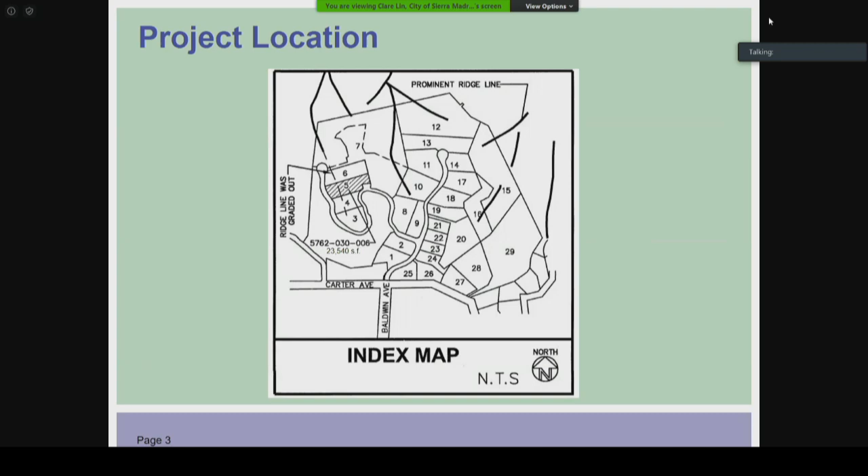Sorry about that. So the applicant took the Commission's recommendation and did a further study on the design, and has returned with revised plans, elevations, floor plans, and renderings that address the Commission's concerns.

First, the applicant has changed out the layout and the footprint. They have relocated the courtyard to the south that faces the views, compacted the building footprint to eliminate the porte cochere, enlarged the rear yard, and increased the south side yard setback.

Also for the second story massing, the architect moved the massing towards the northeast corner, and the south-facing building elevation is condensed by eliminating the lower wing wall and a bedroom on the second floor. The bulk and mass are significantly reduced at the southwest corner. A library and a deck above is set back 8 feet from the front wall.

The architect also revised the exterior finishes on the south elevation, and instead of stucco, changed it to fire retardant treated wood panel, and introduced a Maltese balcony on the north elevation to soften the appearance. Wood window shutters are added to balance the verticality of the window placement.

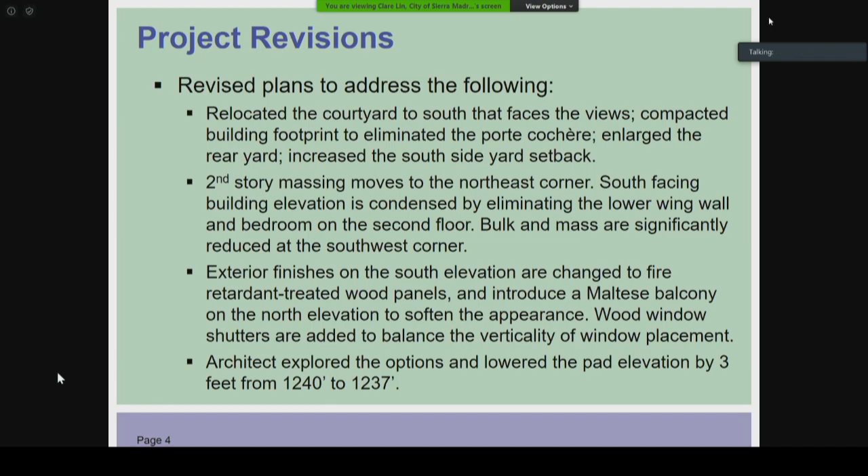Here is the project information, which remains unchanged from last time. Setbacks are increased slightly, but it is a fully code-compliant project.

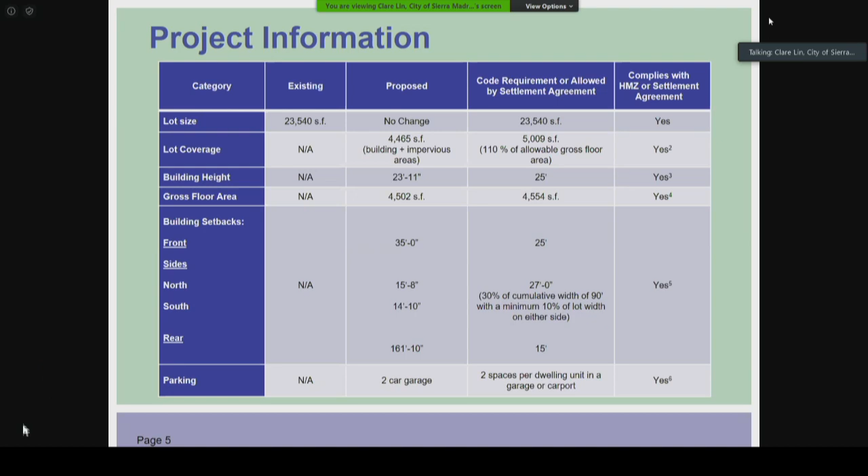Here is the conceptual site plan. You can see from the orange dotted line that is the previous footprint with the porte cochere, and now the footprint is much condensed and compact.

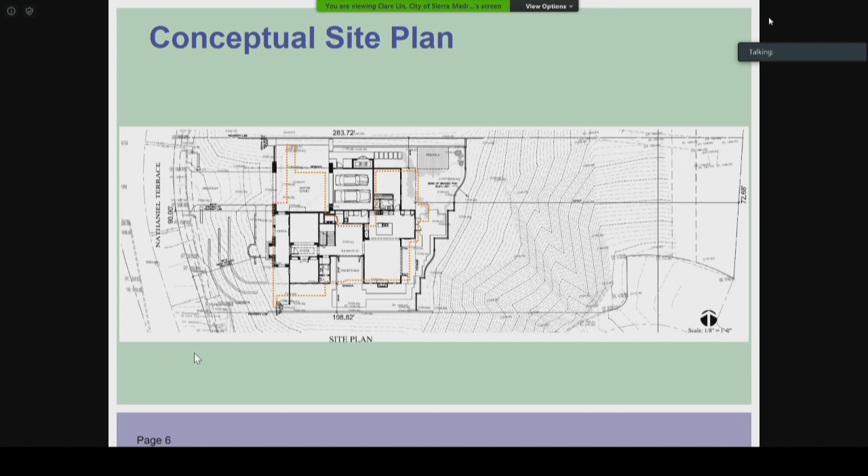This is the conceptual landscape plan. Note that the pavement on the north has been eliminated, and the courtyard has been moved to the south. This is just a motor court, and the condensed footprint allows a larger rear yard, a sizable rear yard at the back. Also the courtyard at the south will be connected with the rear yard, providing multiple seating areas that face the view.

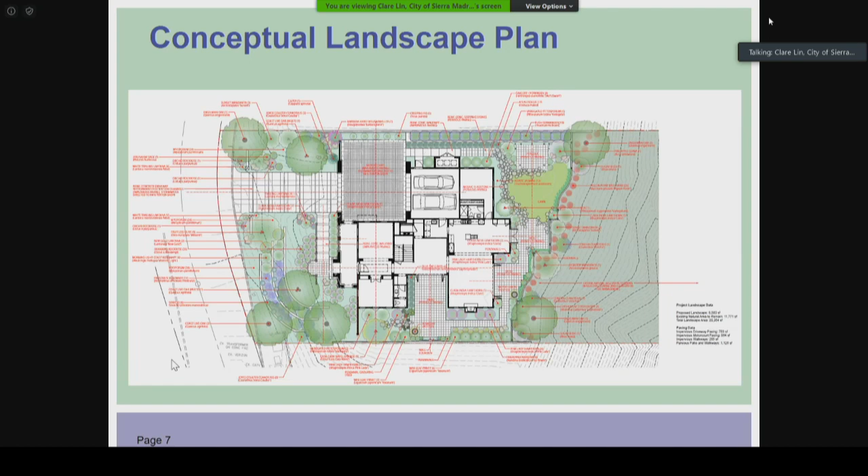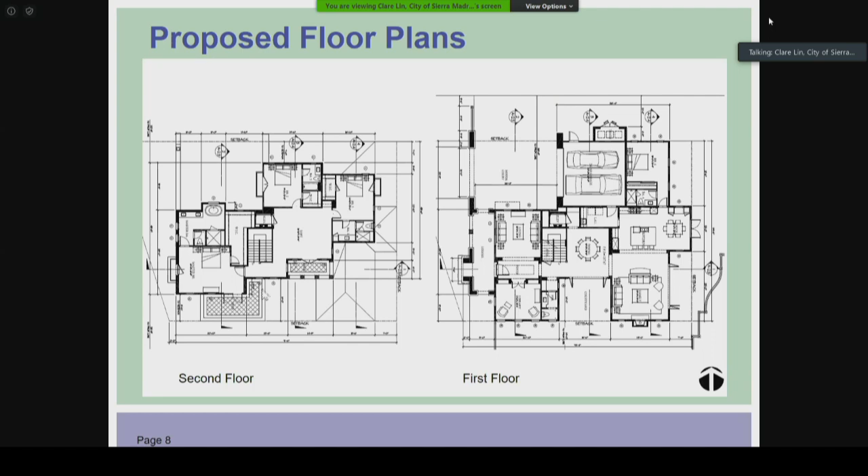Here is the proposed floor plan. Previously there was a master suite on the first floor, which has been eliminated and replaced by a library. On the second floor, it's stretched from east to west, with 3 bedrooms and 3 baths on the second floor.

Here is the revised roof plan. It has significantly changed and is simplified to a more uniform hip roof, eliminating the roof well, the flat area that the previous design had.

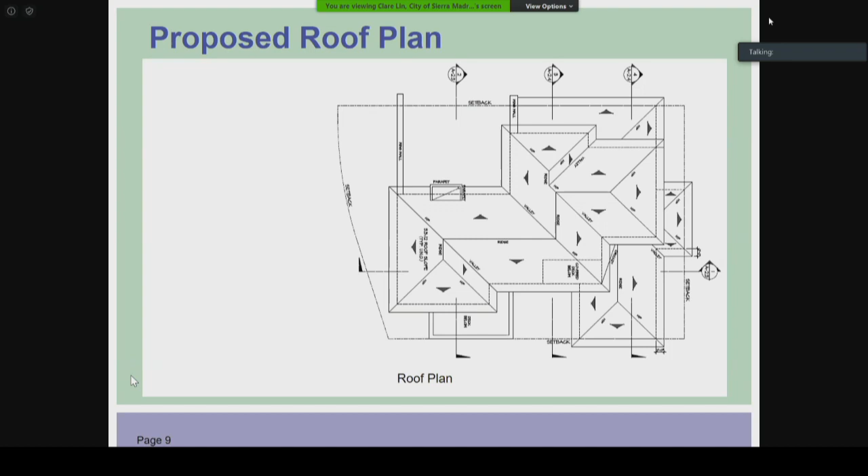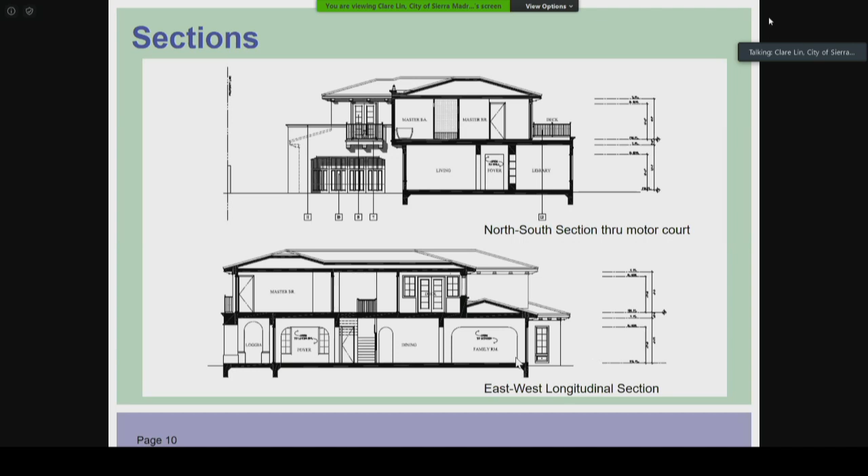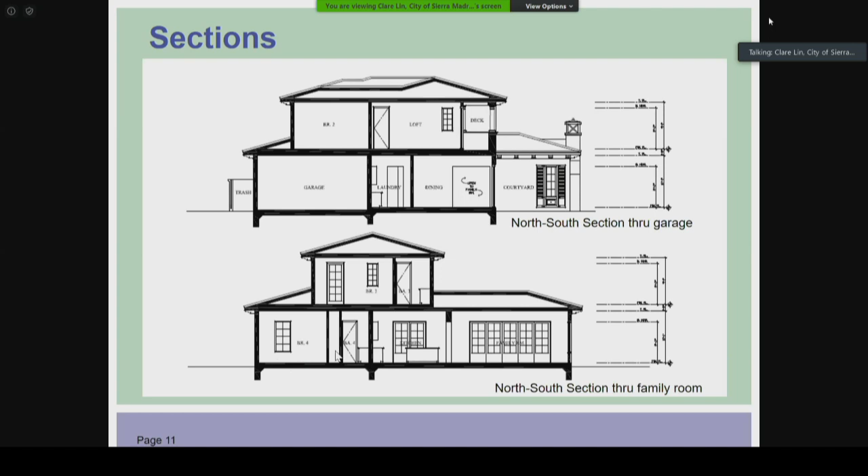Here are the color elevations showing the reduced mass and the shortened wing wall at the southwest side. The building mass is reduced at that corner, and the house still exhibits the characteristics of the Italian Renaissance Revival style. They have kept the low-pitched clay barrel tiles, arch openings, and casement windows.

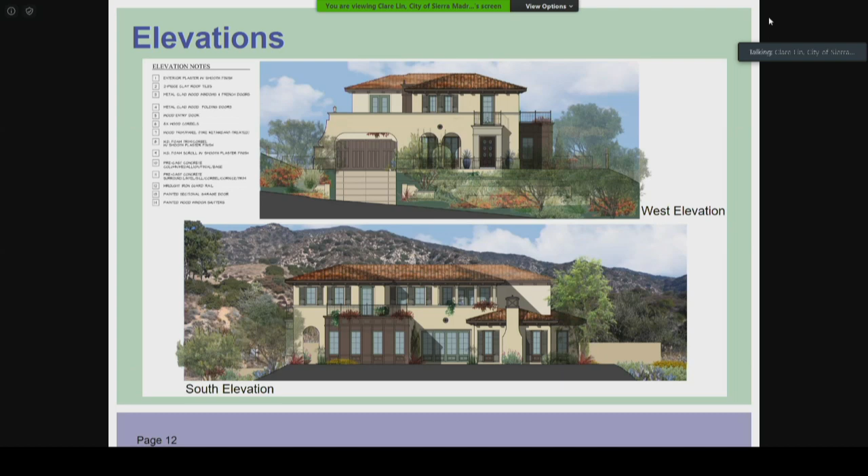At the south elevation, they have introduced wood paneling instead of stucco for the library at that southwest corner. This is the east elevation on top, where they have the painted blue doors and the wrought iron railing. The north elevation is where you see the motor court with the Maltese balcony, and now the trash enclosure is hidden behind the garage on the side.

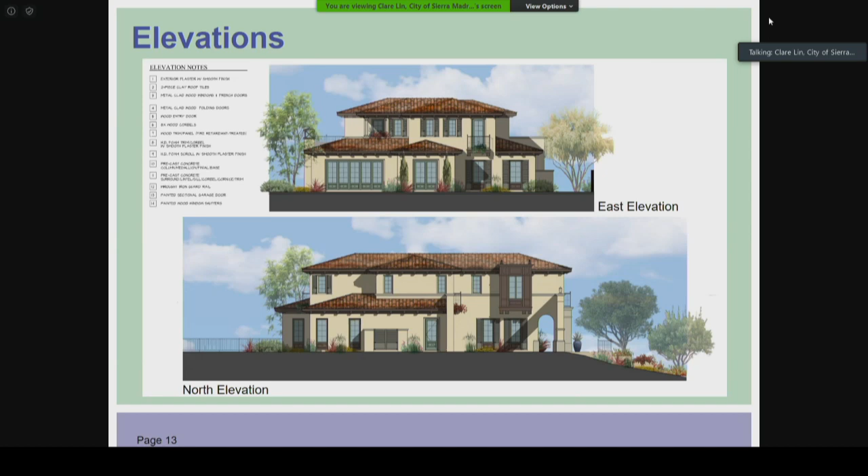Here are the colors and materials that will be used for the project. It's primarily earth tone with bright color selected with a warm trim. The exterior walls are medium beige, and the cast stone resembles sandstone. The windows and panels are painted with dark brown color, and the window frames are finished with blue, the Sierra Pacific slate blue color.

Here is the photo montage of the proposed project viewing from Nathaniel Terrace, looking northeast. And this is a photo montage from Nathaniel Terrace, looking straight east onto the property.

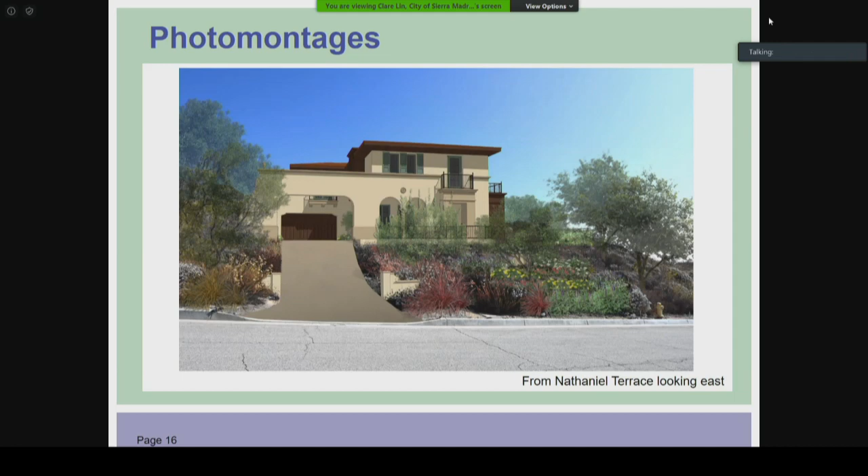Hillside development.

Permit findings have to be made in order to approve the project. Here are the summaries of the findings: the proposed project is consistent with the general plan for single family use, and it meets all zoning regulations as to floor area, height, setbacks, and parking requirements. The new construction is on an existing flat building pad, and the house does not impact the ridgeline views. For the landscape plan, it will incorporate native hillside vegetation, and the majority of the landscape will be preserved. Building materials use an earth tone color palette, and it will comply with the water efficient landscape plan.

Conditional use permit findings have to be made as well. Here are the summaries: the proposed project is differentiated from the existing historic structure. The single family use is consistent with the single family development in the vicinity, and the project meets all requirements of the zoning code and the intent use of the general plan.

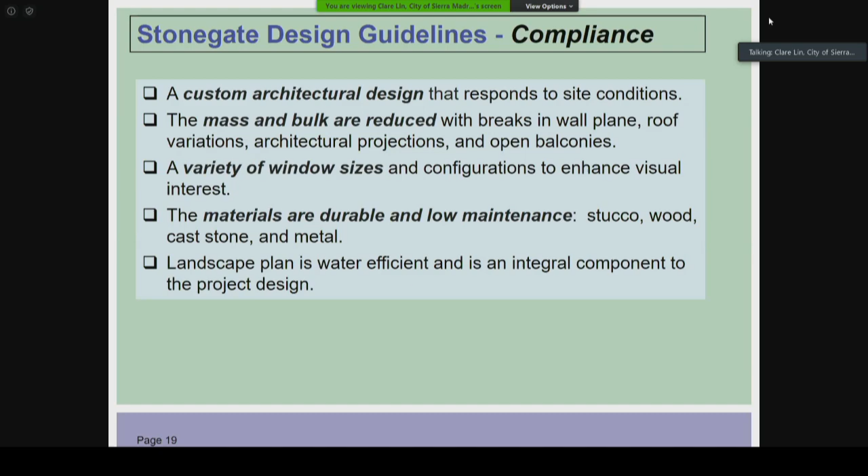The alternatives before Planning Commission this evening are to approve the application pursuant to Resolution 1913, approve the application with modification, or deny the application by identifying the findings that the Commission feels cannot be made and the basis for rejecting those findings, or continue the project and provide staff and applicant with further direction.

Staff is recommending that Planning Commission take the following action and approve the application for Hillside Development Permit 1402 and Conditional Use Permit 1408, subject to the conditions of approval.

That concludes my first part of the presentation, and give me a minute and I'll load up the second.

Everardo, can you hear me? Hello. Hi, Clare. Were you able to see the screen? I can see the screen. Thank you. I guess I'll just mention when we need to change slides—would that be the best way? Yes.

Great. Okay, well good evening Chair Hutt and commissioners. It's great everyone's doing well during this crazy time. We're happy to be here to present our revisions to our project here on Lot 5.

From our last meeting, we did take into consideration recommendations by the commissioners and took another look at the project to see how we can address some of those concerns. Next.

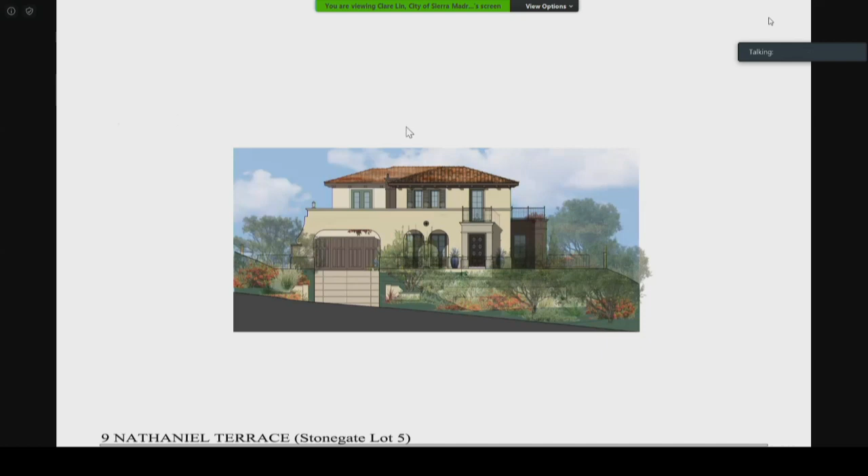One of the first things we did was reduce the size of the motor court. That was a comment before, and it was a good comment, in that our motor court was too large and not really usable for the people inside the house—it became more of an item for cars. So we took a look at that.

We also considered one of the comments, which was to put the garage at the basement. We spoke and reviewed it with the client. Unfortunately, the client decided not to go in that direction, just because of cost—they were concerned about creating a basement and everything related to that.

So what we did was eliminate the porte cochere we had, reduced the size of the motor court, and were able to push the garage forward, still allowing for a small motor court and allowing the garage to be screened from the Nathaniel Terrace. By doing that, it allowed us to reduce the footprint of the house and allow the house to wrap around the garage.

As you can see, the red outline is the original footprint, and what you see now is a smaller footprint. Their areas, especially on the southwest corner, allowed us to really eliminate some of the mass there.

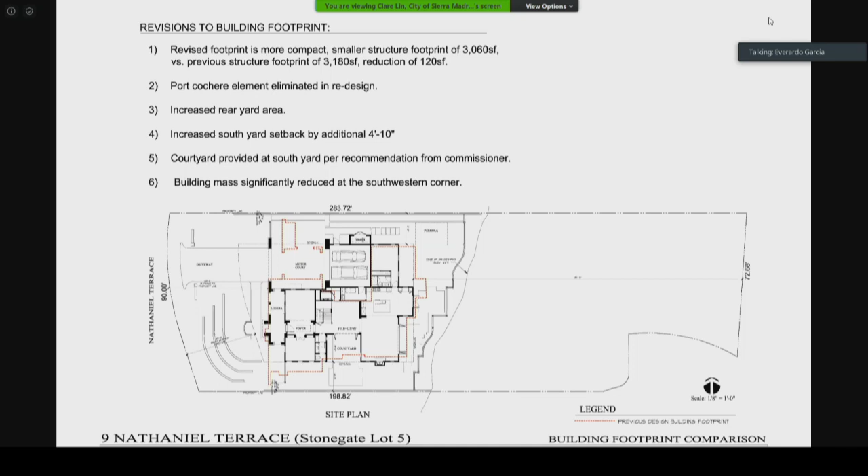In doing so, our south exposure has been reduced in massing. The southwest corner is smaller, and in the next slide we'll see the mass over the two elements closest to the south have been reduced.

Here you can see that we did kind of break apart the elevation and plan on the south side. So that courtyard really helps create a beautiful, workable, livable space, and allows the mass to break on both sides. We'll see once we get to the elevations that it really helps that south elevation.

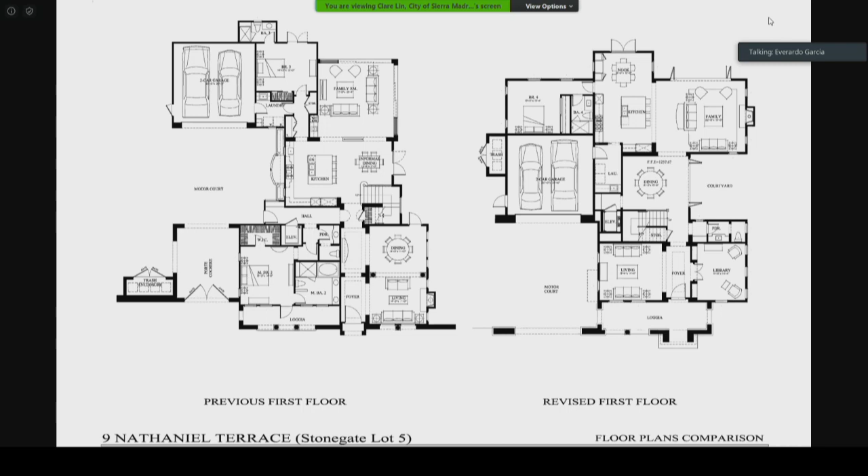What really helps is that we were able to get one-story elements on the south side over the family room and over the library, which will read nicely from the south elevation, which is the most visible. You'll see lower forms, and the second-story mass has been pushed further back, so it won't read as close to the edge and won't be perceived as quickly as it was before.

Here you can see how the second floor, we were able to thin it, make it a little longer, but thin it down. That really helped with our roof plan. I think you'll be happy to note that we did get rid of our roof well. So now the roof is a nice, clean, simple roof, which I think works really nicely.

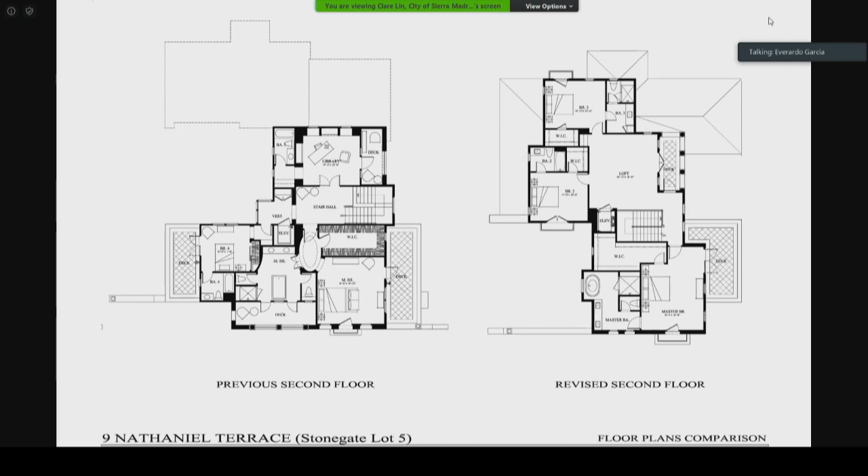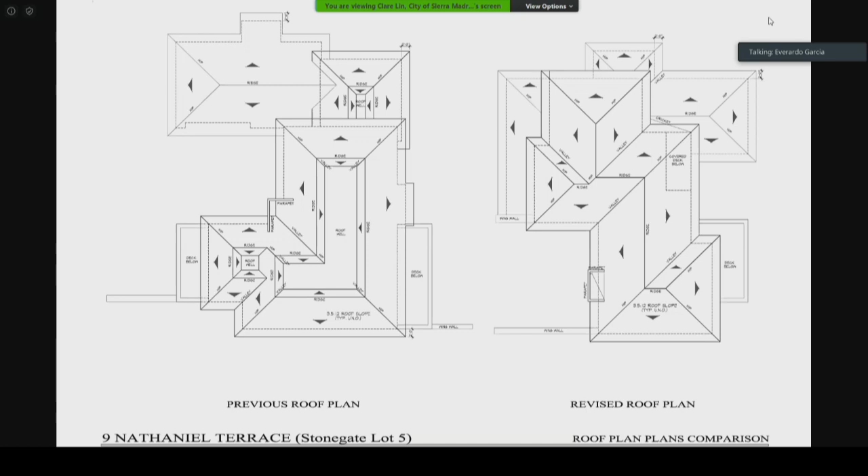The roof became much simpler. You'll see on the south side the smaller roof forms, lower roof forms, and then a much cleaner, complete roof over the main house without any roof wells.

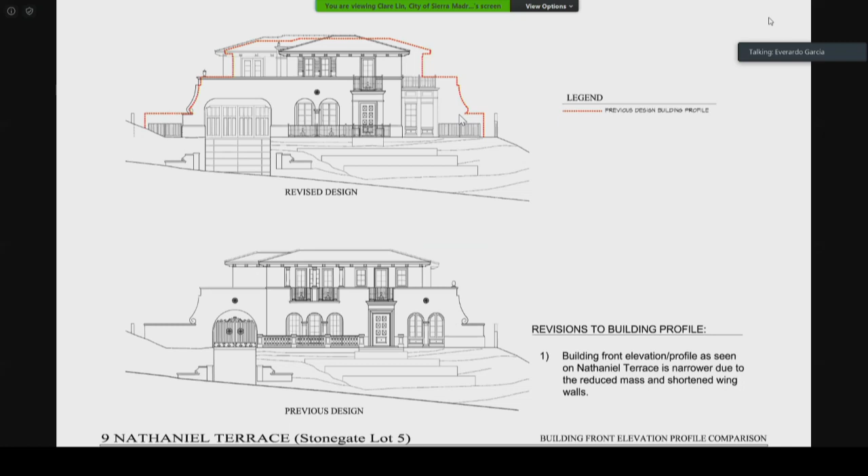Here, what we wanted to show is how we had reduced the massing in terms of the elevation. You'll see with the red outline again, how the house really, in essence, was pushed away from the south property line. We shortened the wing wall on the front elevation. We were able to reduce the mass that faces the street, and also in doing so, was able to push the second floor further away from that edge.

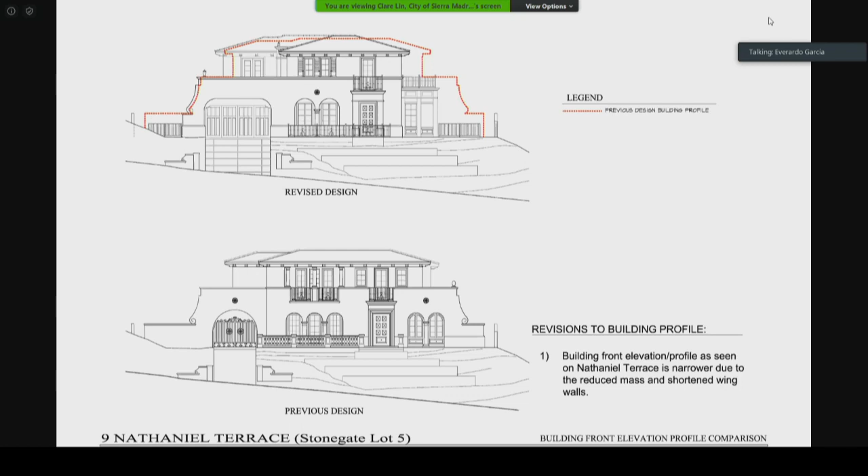It's a much smaller elevation face than we had before. Before it was a much more linear, more planar elevation. Now there's a little bit more movement. We have the main elevation with the entry and the entry into the motor court, and then behind it, we did push back the library about 8 feet, so it doesn't read as part of the front elevation. So it minimizes its impact.

Here really emphasizes the fact that we did break the plane. It emphasizes the strong flat elevation we had before, which is very much a part of the style, but we were able to turn it towards the north side, allow the library to read as a smaller element. And we also treated it differently, in the wood cladding, to help break up the stucco mass that would be perceived from the south. So it helps to break up that long wall.

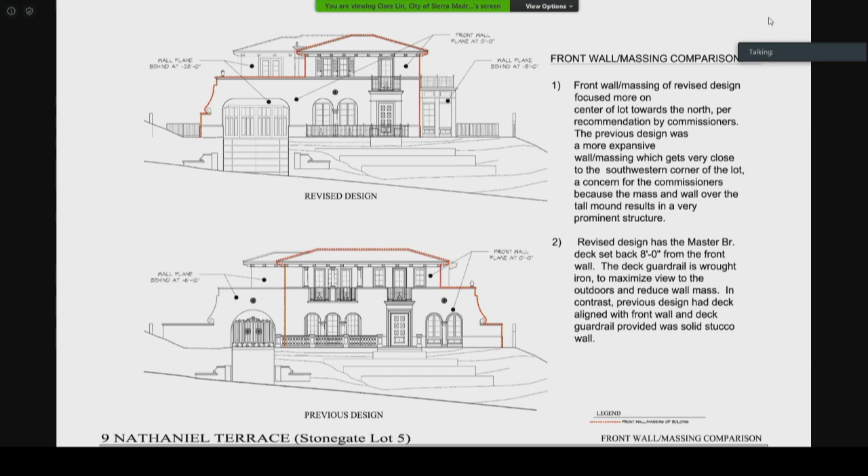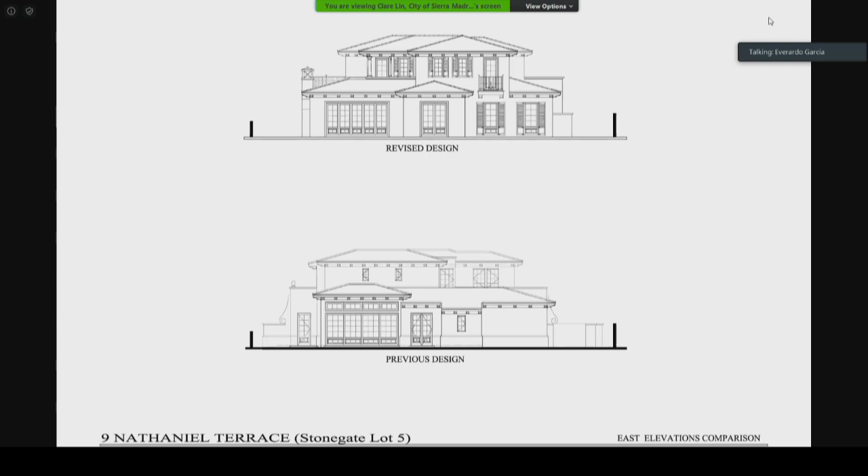Here, I think the top elevation shows how we were able to push the elevation back, so the south elevation is set back, you can see its profile. And the middle of the house is where the two-story mass has been concentrated. Also, I think overall the composition worked out much better. We have nice lower roof forms over the family room, morning room, and breakfast area, and then the other mass we're able to articulate a little bit better with balconies and shutters, creating a much more complete elevation than we had before, especially since the garage faces the rear, so we didn't have that many opportunities to introduce windows. So I think that really worked out well.

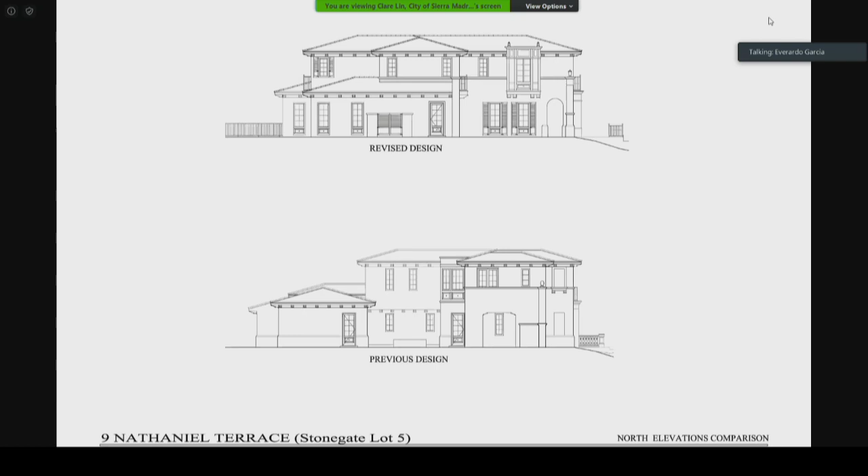We can see the north elevation that shows the motor court and then the low roof forms as well. Even on this side, the second story massing has been broken down and stepped with the lower roof forms, as opposed to the previous design.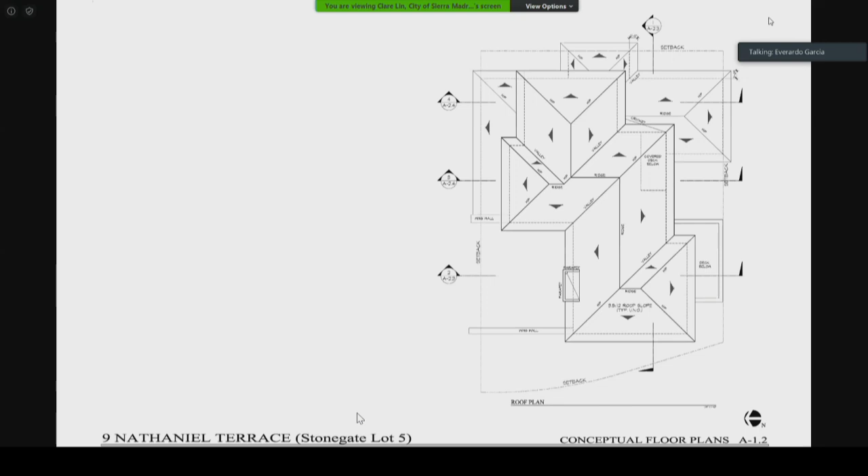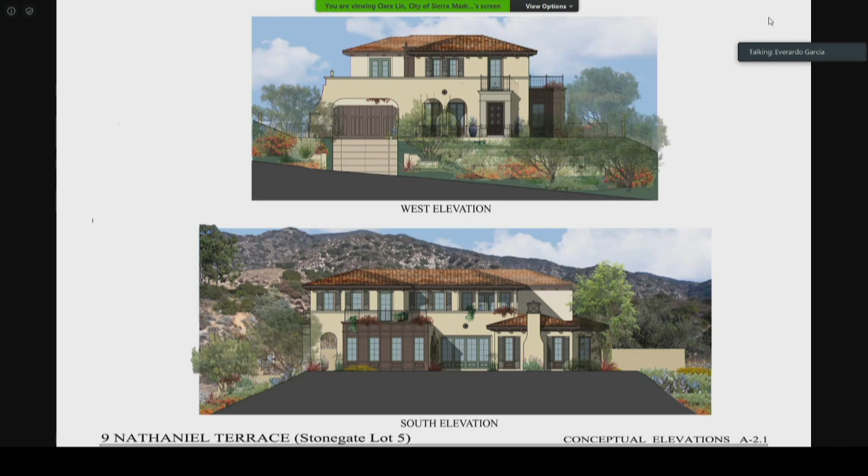You can see that as well on the south elevation, which I think will be a much more pleasant elevation seen from the south side. It's also pushed back a little more than before, so it won't be as easily seen, especially on the southwest corner.

I think the lower one starts to show how we were able to reduce the mass at that corner. One of the comments we received was that the southwest corner was very prominent, with a lot of mass of the building in that corner. So we were able to push that back, cut down one of the wing walls, and treat the library slightly different to help minimize its impact on the elevation.

I think those are the key things we addressed. Overall, we feel much happier with how the building is sitting on the site, and I'm hoping you like it as well. I'm here if you have any questions.

Okay, do we have questions for staff or the applicant? I have a question for Everardo.

The presentation said that the pad elevation was dropped 3 feet. Yes, and that was due to the fact that when it was originally graded, it was graded at the incorrect height. Okay, so did the whole pad where the house sits drop the 3 feet, or was it just the driveway? The whole pad would be dropping.

Well, actually, the dropping of the pad was done on the previous design as well. What happened is when they originally graded the lot, they graded it incorrectly. So in our original submittal and in this one, we're showing it at its original, correct pad elevation, which means they would have to grade it down about 3 feet.

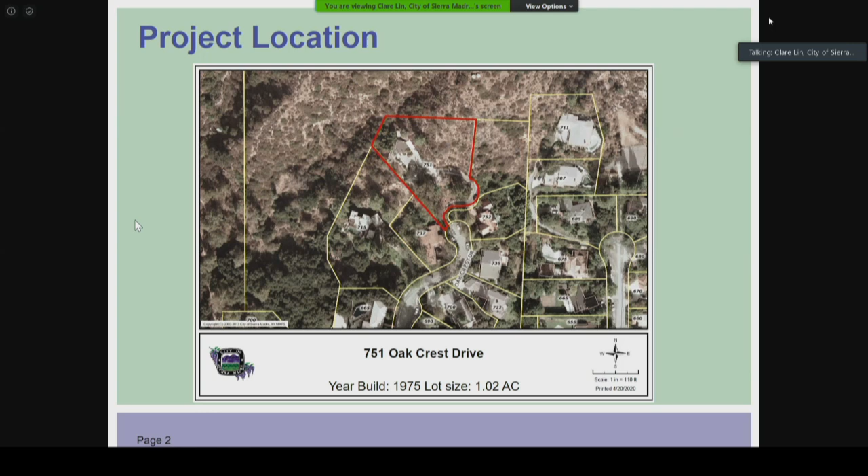Here is the site plan of the property. The primary building is built in 1975. It's a pyramid-shaped structure with 3 levels and situated at the south half of the lot. And there is a 1-story guest house, a garage, and also a motor court in the middle.

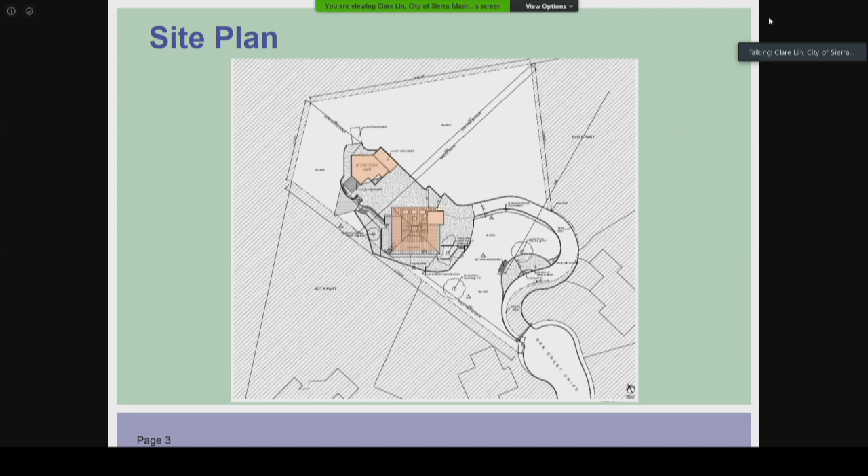The structure itself is approximately 43 by 43 feet square, and the detached guest house is approximately 737 square feet, with the one-car garage that measures 266 square feet. So the total area is approximately 4,500 square feet, and all the structures are on a nearly flat existing pad.

So the applicant is requesting that the Planning Commission allow the modification to the previously approved permit, which granted the exterior decking, standing seam metal roof, and alteration to the garage roof and the new trash enclosure. Pursuant to the municipal code, any remodel addition to the existing legal primary structure, which are consistent in character with the original structure and compatible in scale, proportion, and character with the neighboring properties, shall be subject to granting of an administrative hillside development permit.

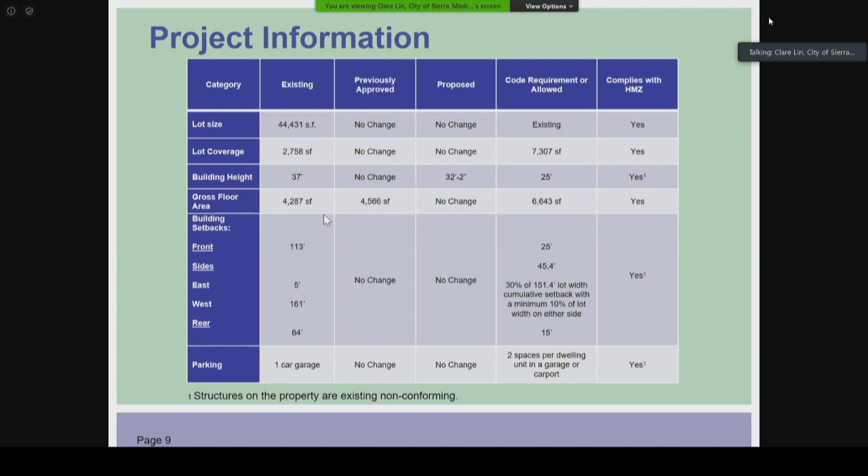The proposed renovation is intended to bring this unique residence to be more compatible in scale and proportion with the neighborhood, so they're proposing straighter walls and a conventional roof. The proposed low pitch shed roof design is appropriate for this kind of contemporary style architecture, and the new roof design will be 5 feet lower than the original pyramid shape.

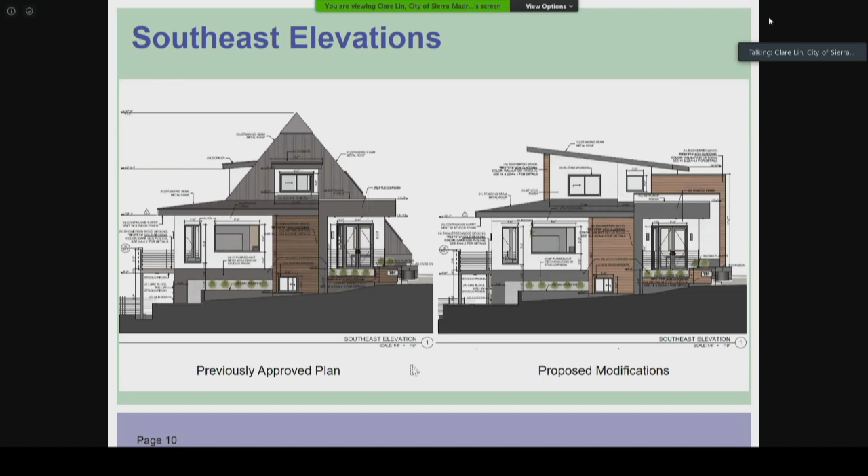Here is the southeast elevation, facing the view. The shed roof here is opening up towards the view and sloping towards the hillside.

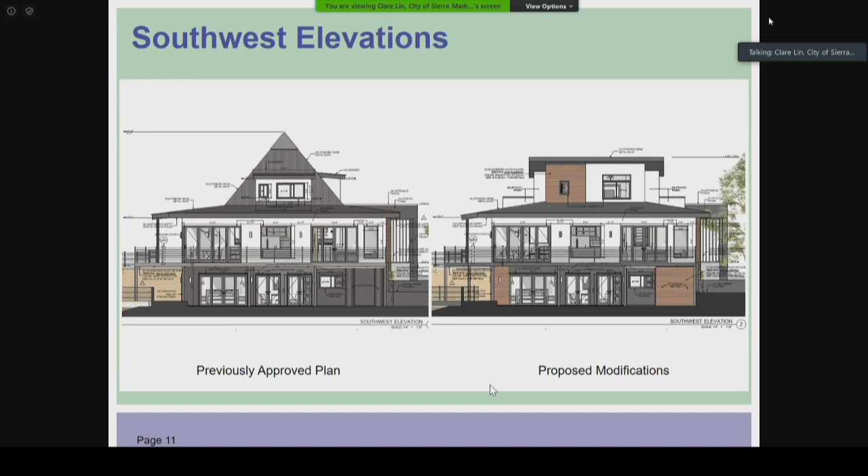This is the southwest elevation, and this is the northeast elevation, which is the elevation you see when you pull in from the driveway.

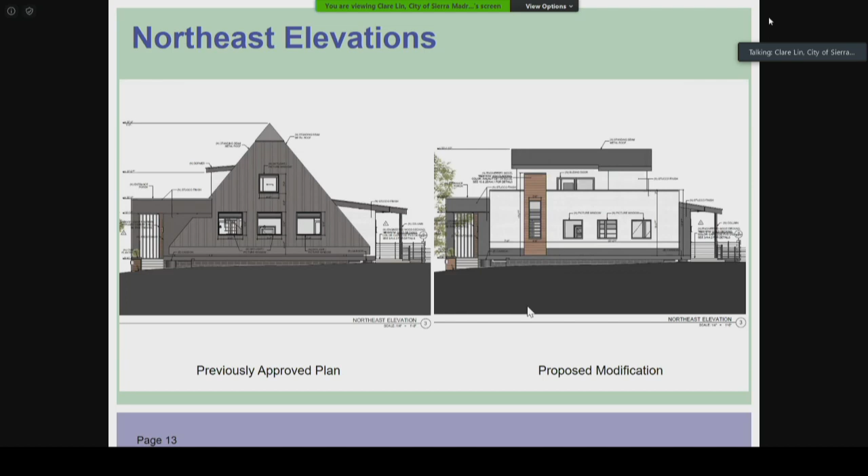The proposed design will significantly improve the energy efficiency as well as the aesthetic of the structure. However, the proposed design has deviated from the original character and design of the original structure.

Here is the floor plan. The one on the left is the existing floor plan, the one in the middle is the previously approved plan, and the one on the right is the proposed modification.

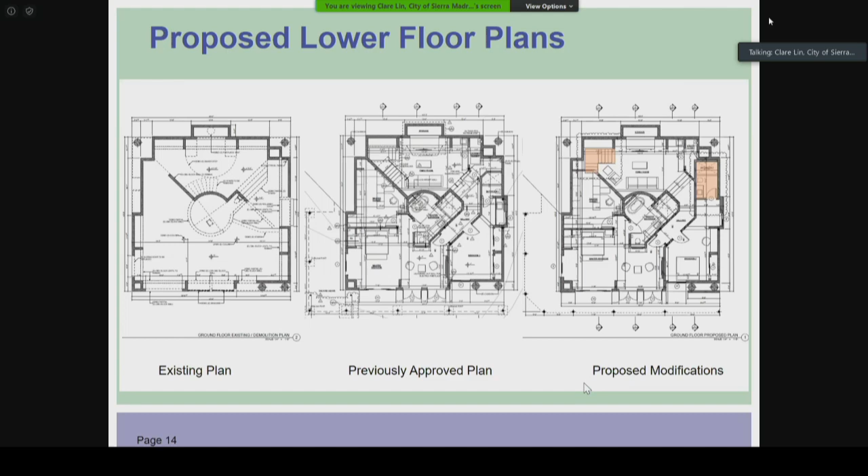On the lower level, the modification is only to the interior staircase and a bathroom. On the first floor plan, the proposed modification is to swap out the storage room for a wine cellar and a laundry room, and also to modify the staircase, eliminating the spiral staircase leading up to the upper floor and instead proposing an L-shaped staircase.

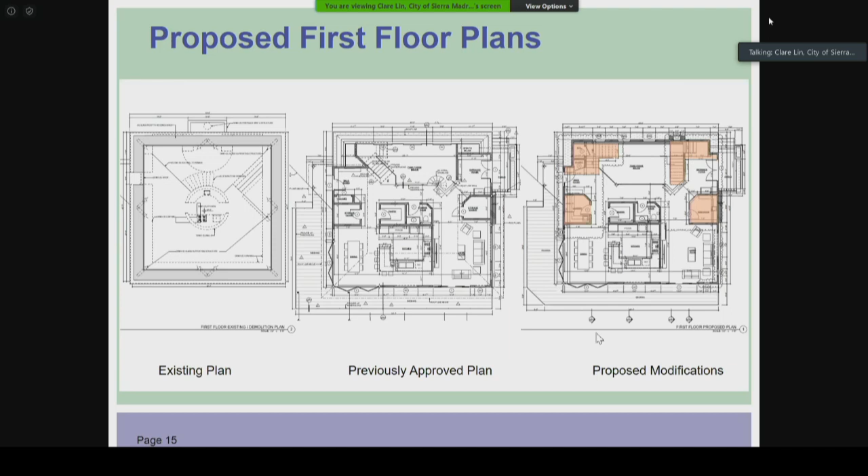The proposed upper floor plan changes from this double height area, eliminating the spiral staircase, into a more functional space with a squared-off wall and a staircase leading to the lower level. Because of the reduction in area here, there is no additional floor gain, so the square footage remains the same.

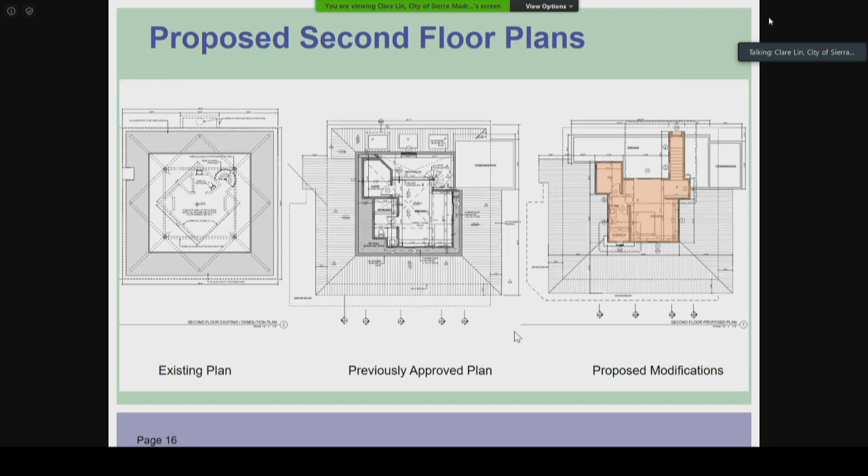Here are the colors and materials proposed for the project. They will be using stucco exterior finishes, fiber cement panels, engineered wood siding and wood decking, and standing seam metal roof.

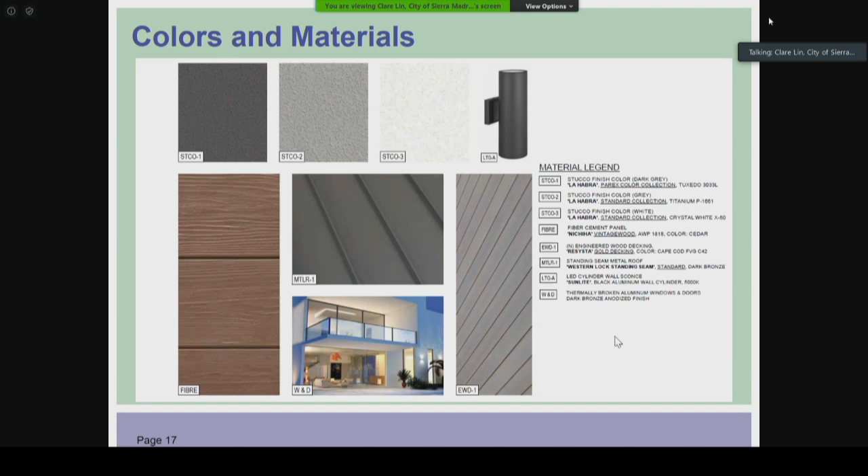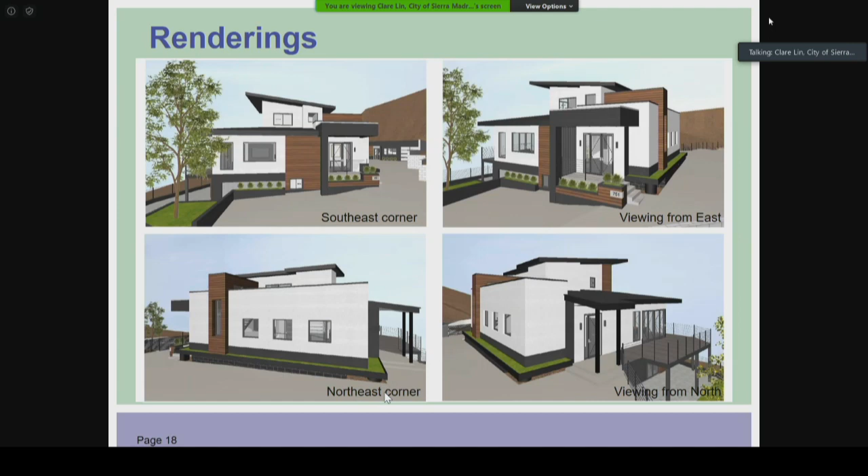The administrative hillside development permit finding has to be made. Here is the summary: the proposed modification is consistent with the general plan for single family residential use. The existing structures are legal non-conforming, and the proposed modification meets development standards in floor areas and lot coverage.

The development minimizes natural hazard and maximizes access to open spaces. As the development is within the existing footprint, there is no added square footage, and the remaining site will be unaltered, with native hill vegetation preserved. The proposed project also eliminates environmental impact, as the modification maintains the same use and no additional living space will be added.

The proposed design is less non-conforming by lowering the height of the structure and complies with the design and development standard.